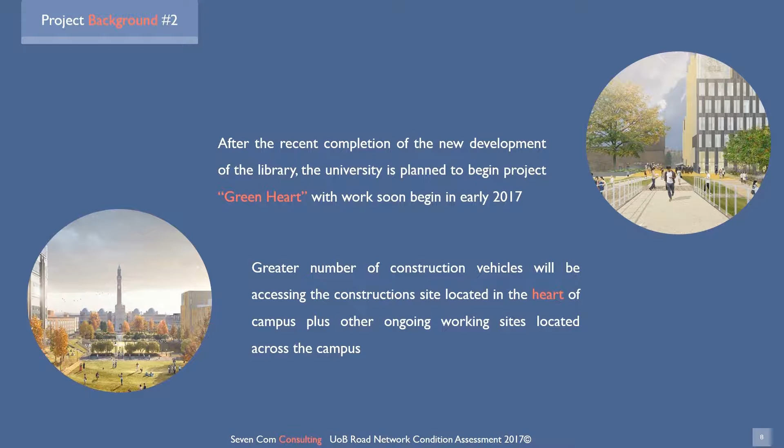It is expected that a greater number of construction vehicles will be accessing the construction site, located in the heart of campus, plus other ongoing working sites located across campus. The road network in Edgbaston campus provides a vital role for staff, students, visitors, and construction workers to access the campus through cars, cycles, or even larger vehicles such as coaches and construction vehicles.

However, even with adequate maintenance, pavement will deteriorate over time. The rate of deterioration will depend on a number of factors, including the traffic loading, pavement design strengths, the climate and environment. Eventually there are needs for pavement maintenance, upgrading or reconstruction. So why is road management important?

The major aim of road management is to maintain and improve the existing road network, to enable its continued use by traffic in an efficient and safe manner. Road asset management has the purpose of maintaining and improving the existing road network, to enable its continued use by traffic in an efficient and safe manner. Appropriate management must also take into account issues of effectiveness and concern for the environment. Road management can be seen as a process that is attempting to optimize the overall performance of the road network over time.

Maintenance reduces the rate of pavement deterioration. It lowers the cost of operating vehicles on the road by improving the running surfaces, keeping the road open on a continuous basis. It maintains the level of service and road conditions, improves safety, and decreases the overall road agency cost for accident clearance.

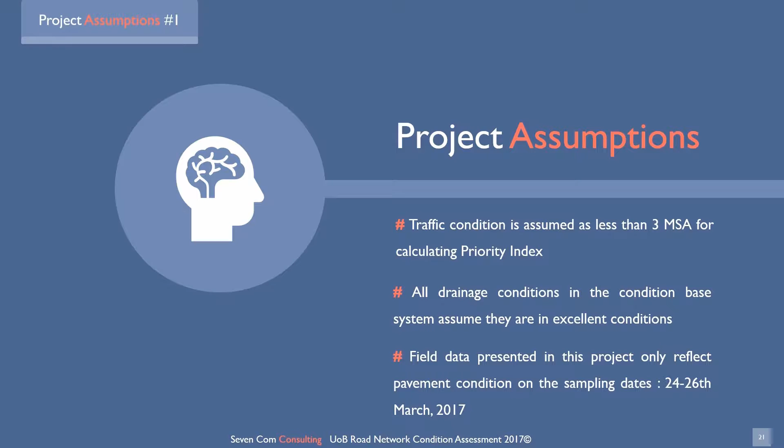The following assumptions were adopted throughout the entire project. Traffic condition in the campus is assumed as less than 3 MSA for calculating the priority index. All drainage conditions in the condition-based system are assumed to be in excellent condition. Field data presented in this project only reflect pavement condition on the sampling dates, 24th-26th of March, 2017. Another constraint is that not the whole management cycle is considered in this project due to the lack of information provided. Activities implementation, monitoring and auditing are not included in this project.

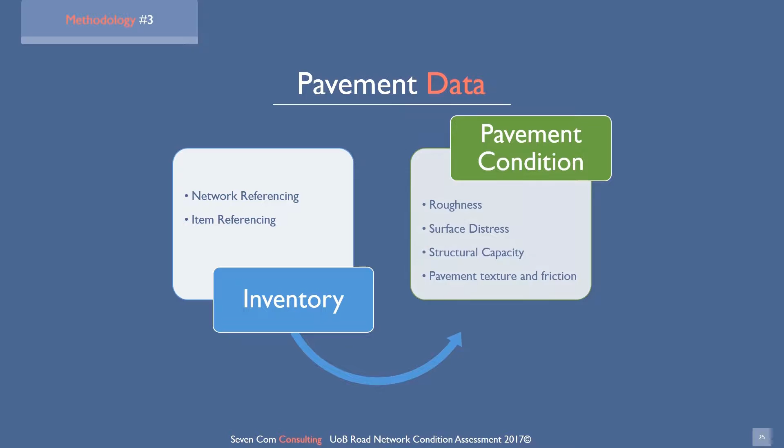Information groups in data collection can be identified as inventory and pavement condition in this project. The inventory includes network referencing, which breaks the road network into successively smaller sections and subsections, with a unique reference for each of them. Item inventory relates to features of the road network. It records items such as length, width of the roads or details like road signs.

Computer software Google Earth is used as a tool in the planning stage when performing desk study. It is used to examine the overall topography to give groups an estimate and overview of the local topography area. It can also be used to estimate measurements, such as the length and width of road sections. The software assists our team to plan the network and item referencing system through satellite aerial photography before field survey, enhancing our efficiency during field surveying.

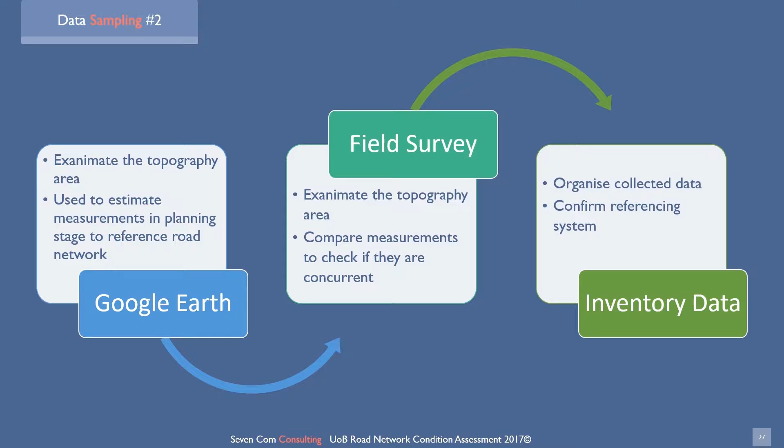The field surveying includes using Merlin to measure the road roughness, giving visual inspection to any surface distress and structural defects, while comparing measurements estimated from Google Earth to confirm the final inventory data.

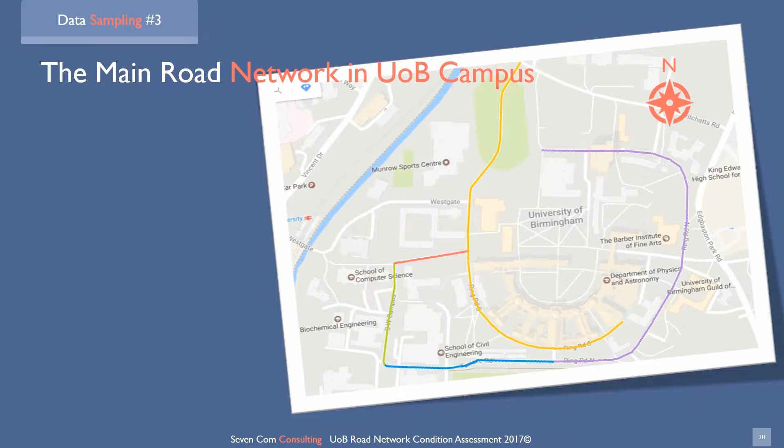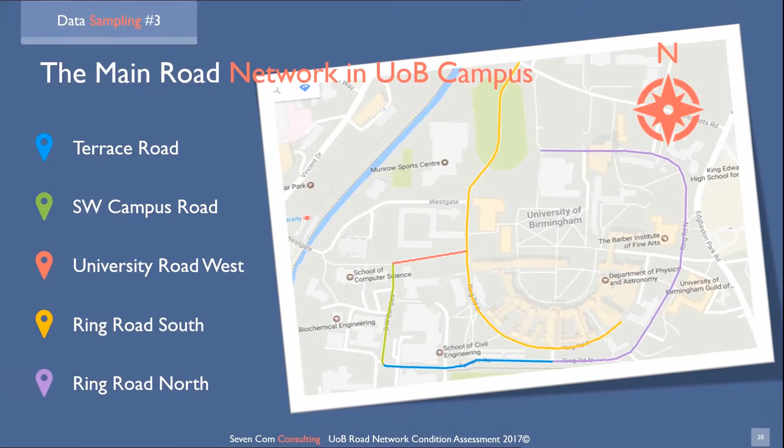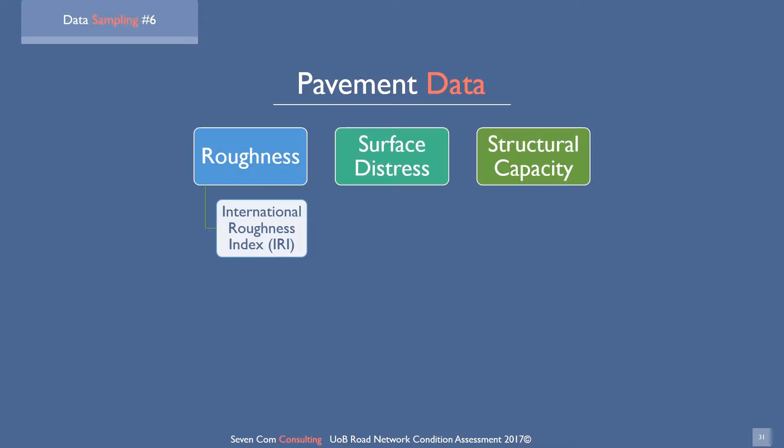Pavement condition is assessed by visual inspection and measuring defects, and it is convenient to group these in terms of the following parameters: roughness, surface distress and structural capacity. Roughness is measured as the longitudinal unevenness of the road and is the major determinant of changes in vehicle operating cost, which is therefore probably of greatest concern to road users. Roughness is measured by equipment called Merlin in this project. The unit adopted is International Roughness Index, IRI.

Surface distress concerns uneven patching, rutting and polished aggregate in this project, and these are assessed by visual assessment. The structural capacity is assessed by visual assessment. It concerns the ability of the road to sustain traffic and environmental loading. Untreated cracks and potholes can lead to water ingress of the road base, resulting ultimately in structural defects.

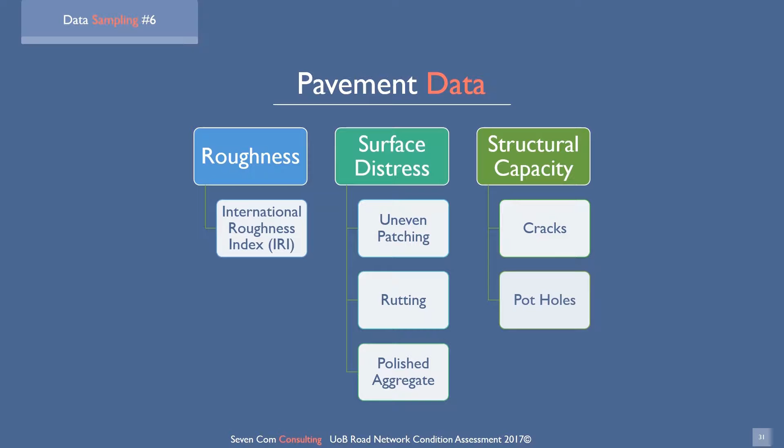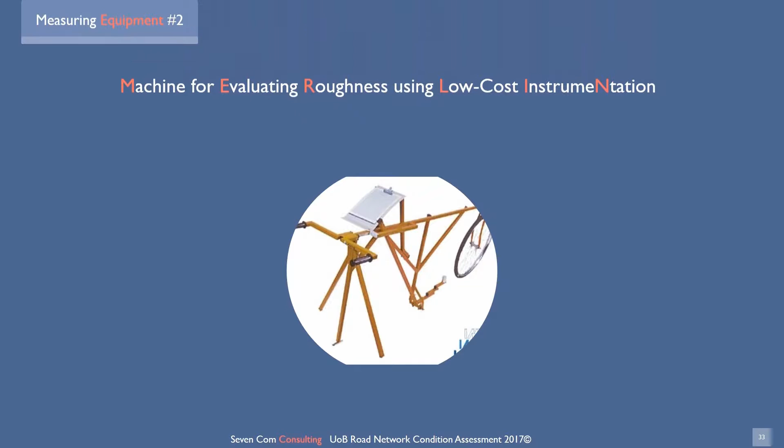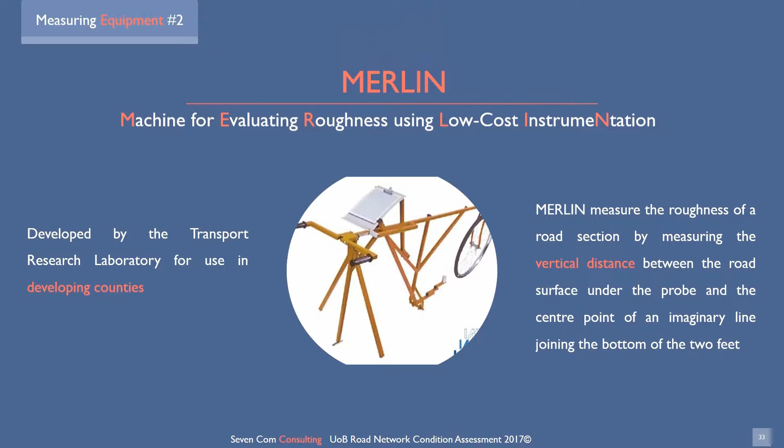The Merlin was developed by the Transport Research Laboratory for use in developing countries. Merlin is easy to use, self-calibrating, robust and can be constructed with readily available components. Merlin measures the roughness of a road section by measuring the vertical distance between the road surface under the probe and the center point of an imaginary line joining the bottom of the 2 feet.

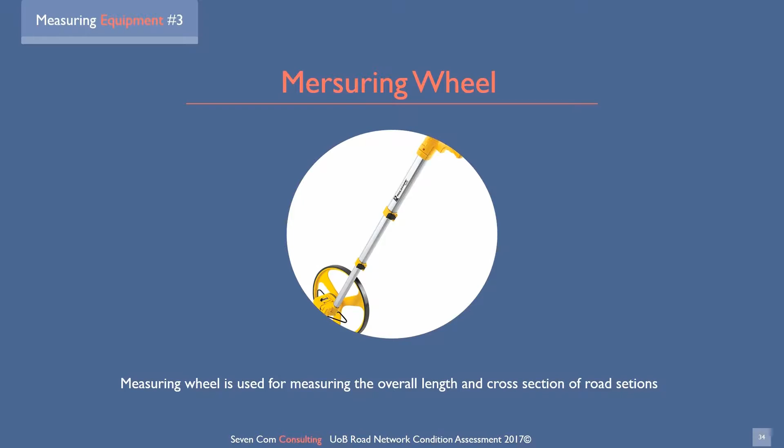The measuring wheel is equipment that is lightweight, compact and economical to use. It is used for measuring the overall lengths and cross-sections of subsections of road networks. The following video will demonstrate the use of Merlin and measuring wheel for data collection. Roughness is defined in engineering practice as surface unevenness which adversely affects ride comfort. It is expressed by a numerical scale named International Roughness Index, IRI.

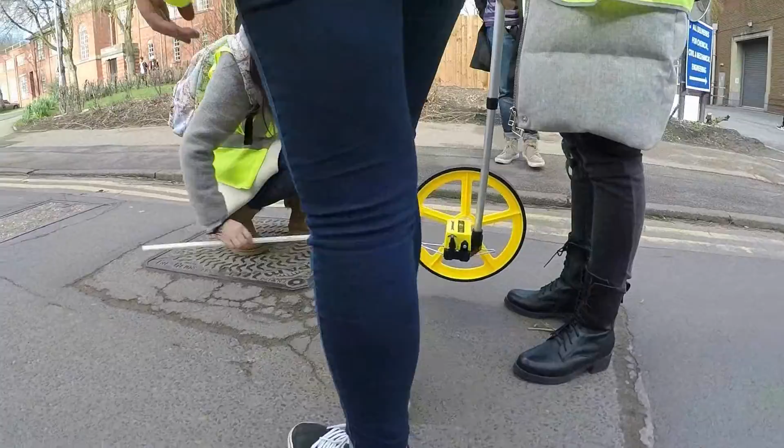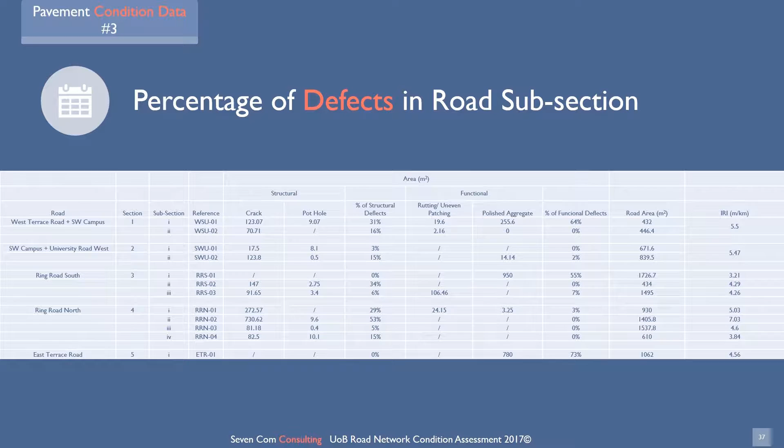After data collection stages, data are input into Excel for organization and filtering. Pavement condition data are identified as structural and functional defects and IRI. The number of cracks, potholes, rutting, uneven patching and polished aggregate observed in visual inspections were converted into percentages, in a ratio to the total area of each of the road sections identified in the network referencing system.

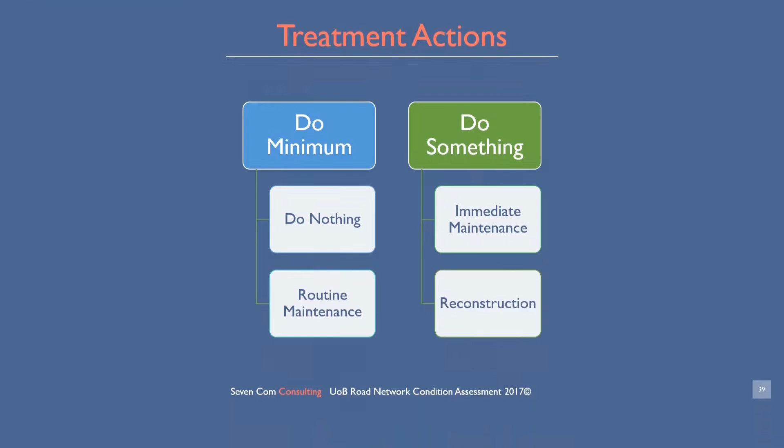After the data analysis, a first-generation decision support system takes place. It uses intervention levels to determine types of treatment and the number of treatment options considered per section. A prioritization method based on treatment-based methods is used to give priority to the pavement maintenance sequence. In terms of treatment actions applied to the pavement, at least 2 options of actions are considered. They are do minimum and do something options. The do minimum options include doing nothing and routine maintenance, while the do something options include immediate maintenance and reconstruction. In total, 4 generic treatment actions are established for pavement maintenance.

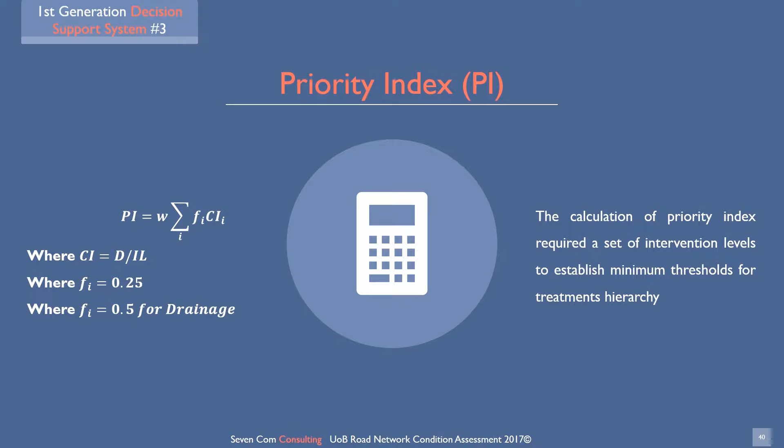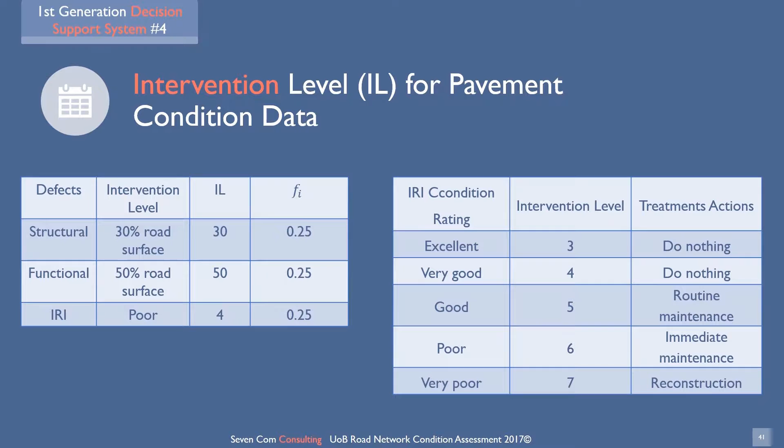The first generation decision support system is based on a defectiveness index, where the priority index is determined on the choice of treatments to be applied. The priority index can be expressed as the formula shown. The calculation of priority index requires a set of intervention levels to establish minimum thresholds for the treatment hierarchy, and they are identified in the following tables. The treatment hierarchies are identified as 4 major roles. The 4 treatment options are do nothing, routine maintenance, immediate maintenance, and reconstruction.

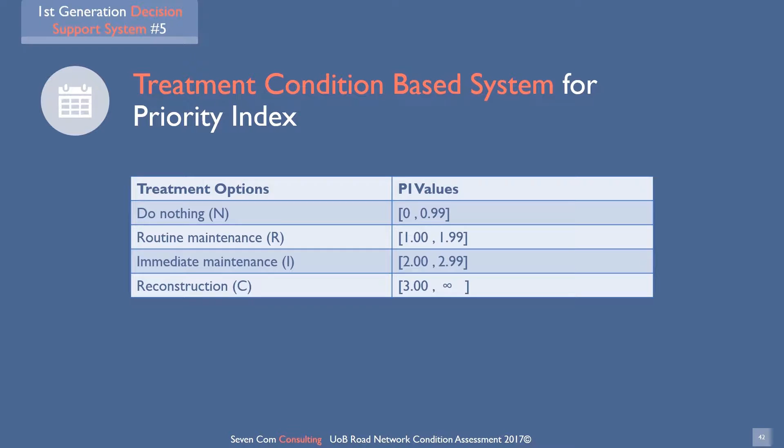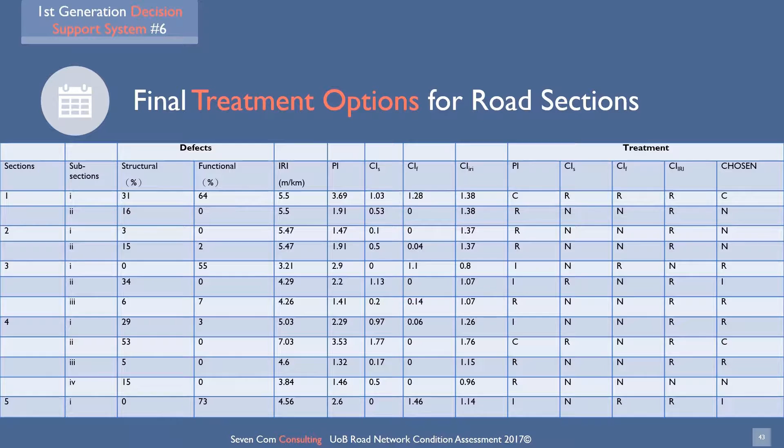These treatment options are pavement condition responsive, where work is triggered when condition reaches a critical threshold. The final treatment options for each road section with regard to PI values are listed in the table for further analysis. Cost is particularly important in the stage of prioritization. It has to ensure an adequate return in terms of benefits from committing expenditure. Any commitment of expenditure can be considered as making an investment. The additional purpose is to ensure that the investment option adopted gives the highest return in relation to the time of the investment, the internal rate of return, IRR.

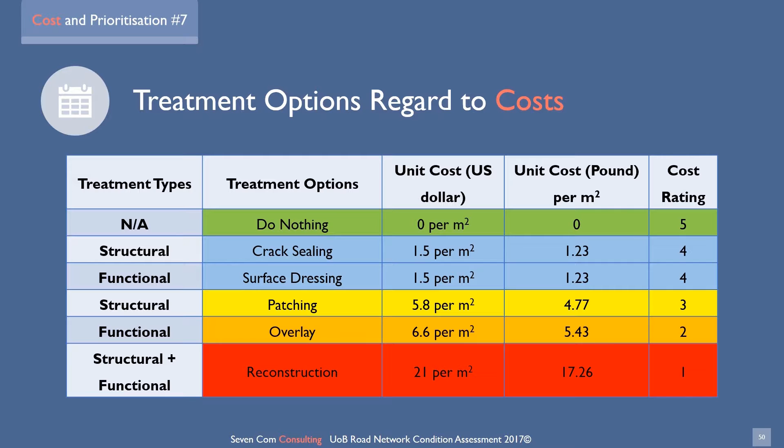As the method of prioritization in first-generation decision support systems is based on the function of present cost condition, further development of table representation of severity in pavement conditions is necessary. Similar to the table before, red represents the most expensive treatment options, while green represents the least. Since there is a lack of information supplied from the client, the budget of the overall project is unknown. Thus, it is unavailable for cost to have a set of priority, as the pavement condition data at this stage is not reliable. They do not realistically reflect the road condition. It is difficult to assign treatment options for each subsection. Instead, an indicative estimate of cost is provided for reference. Nevertheless, the priority of maintenance of the pavements should always put pavement condition as the priority, as it can affect the safety of road users immediately.

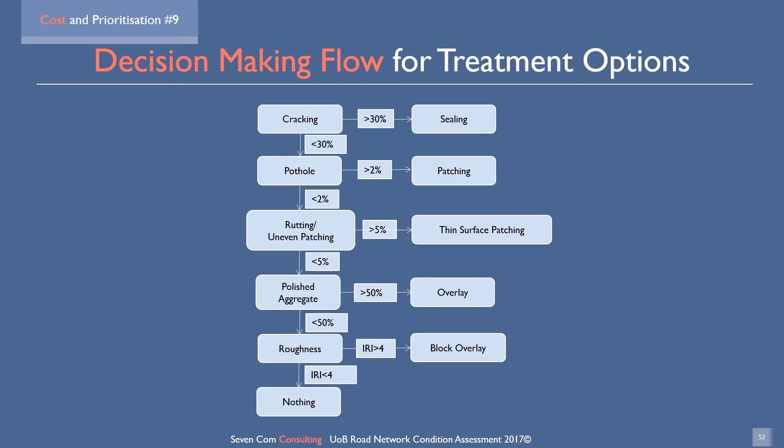Decision-making flow is crucial for assigning treatments. It requires experienced engineers' judgments to set thresholds for which limits of defects cannot be exceeded. This decision flow chart provides an estimation of how treatments can be assigned in the maintenance priority and cost table, which is based on the percentage of defects calculated.

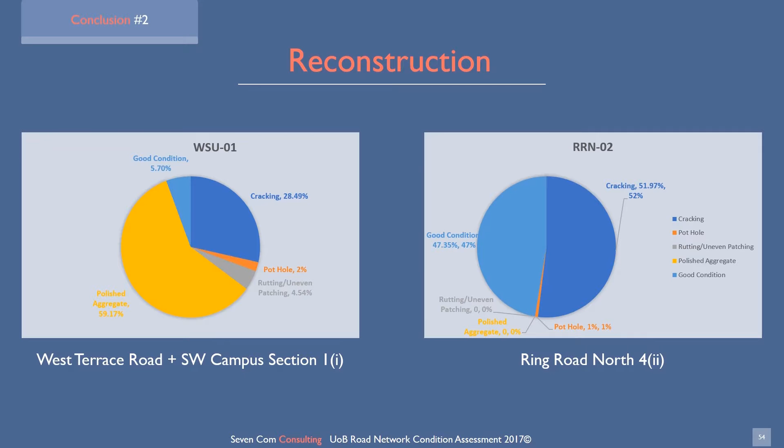To summarize, 2 subsections require substantial reconstruction. They are the first section of West Terrace Road and SW Campus, and the second section of Ring Road North. The first section of West Terrace Road and SW Campus suffered 28.49% of cracking, and 59.17% of polished aggregate on road surface, in the entire subsection road surface area. The second section of Ring Road North suffers excessive cracking with 51.97% of its subsection's surface area. Both of them have values greater than 3 in priority index. With regard to intervention level in Table 4, they require substantial reconstruction or further development and upgrade to ensure its safety features.

The second section of Ring Road South, RRS-02, and East Terrace Road, ETR-01, require immediate maintenance. RRS-02 suffers a significant number of cracks, with 33.87% of cracks found in the overall subsection road surface area. The whole section of ETR-01 suffers with 73.45% of polished aggregate on road surface. Both of them have values between 2 and 2.99 in priority index, with regard to intervention level in Table 4, which leads to immediate treatment options, such as crack sealing, patching and overlay.

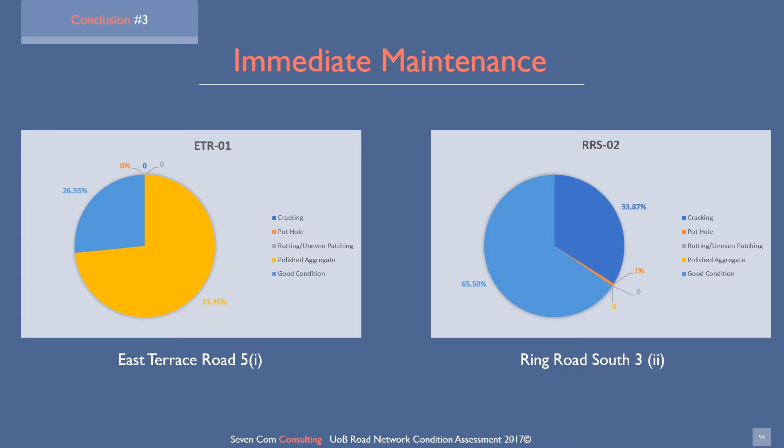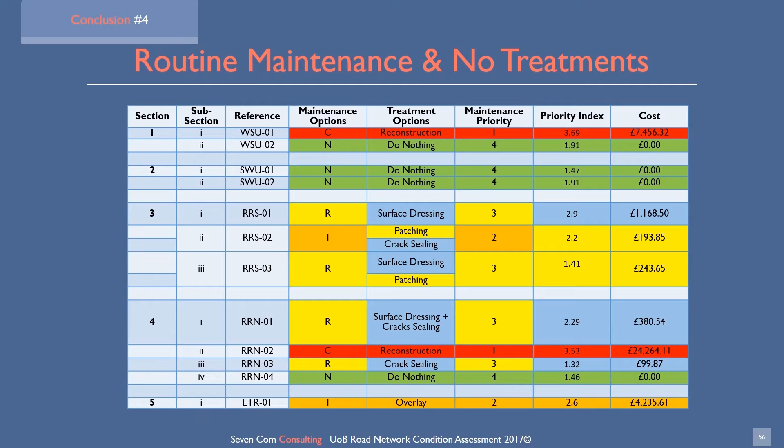4 other subsections require routine maintenance, as the threat to road users is not immediate and treatment can be scheduled at a later time. They are the first and third section of Ring Road South, and the first and third section of Ring Road North. 4 subsections do not require any treatment, as their condition is regarded to be safe, as only a small number of surface defects were found. They are the second section of West Terrace Road and SW Campus, both subsections in SW Campus and University Road West, and the fourth section of Ring Road North.

Further improvement can be made in the data collection sections if advanced measurement equipment were used. For example, deflection of the pavement can be back calculated using the FWD method. If a falling weight deflectometer test could be performed, the FWD model would give greater insight into the pavement response and performance in structural integrity of the pavement. The pavement performance model can be used to investigate the level of surface distress and structural performance of a pavement. These data are more reliable for a decision support system.

However, it can be argued that using such advanced equipment will lead to a greater burden in the cost of the project. Since most of the techniques of measuring defects are based on visual inspections, problems of repeatability and reproducibility are likely to be considerably greater. This is because inspectors may have various perceptions of the severity of the problems, particularly if they are from different regions. Using measured condition rather than rating gives more accuracy in making decisions.